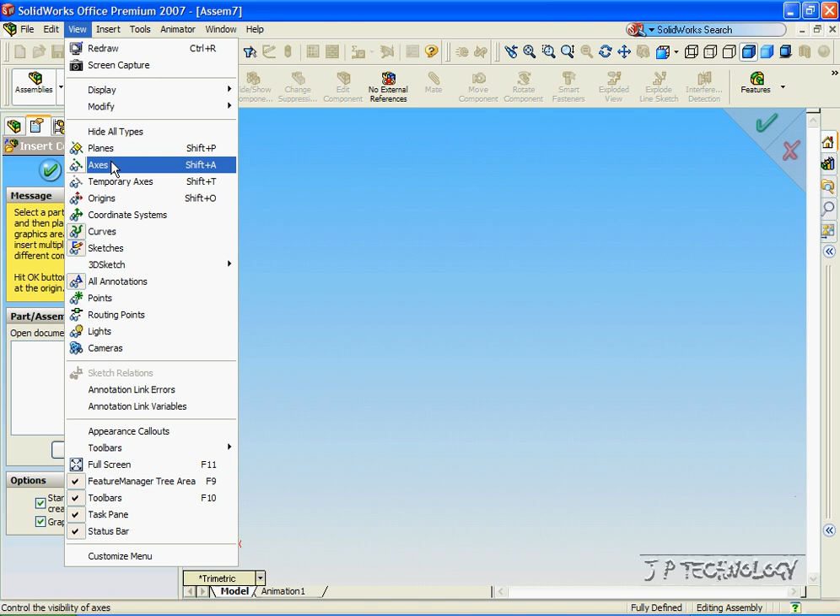To start off, let's open up a new assembly file. Let's click File, click New, click Assembly, click OK. Now let's view the origin by clicking View, then Origin, and let's browse for the parts that we need.

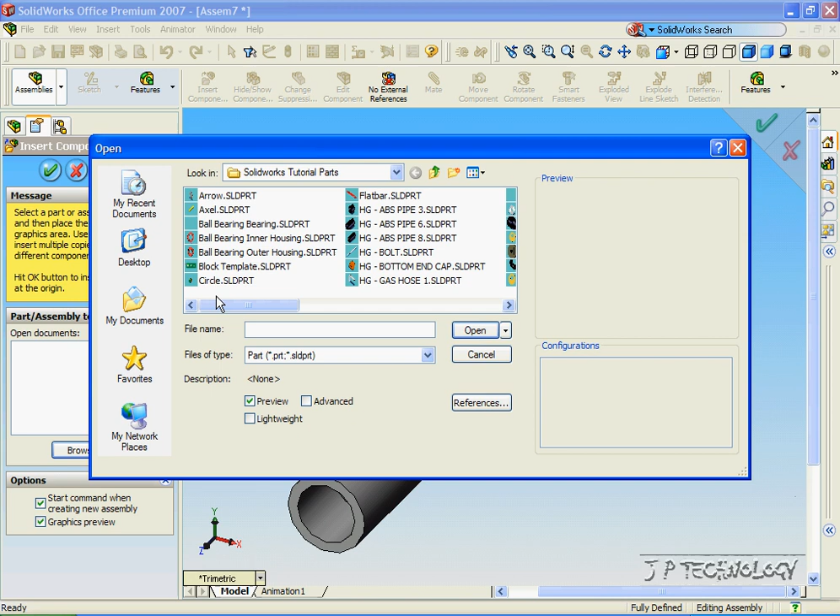All the parts that we need are found on the DVD, and the parts are Telescopic 30, 45, and 60. Now with Telescopic 60, let's open it up and we'll put it to the origin. Now let's get number 45 and put it beside 60, and we'll get 30 and put it beside 45.

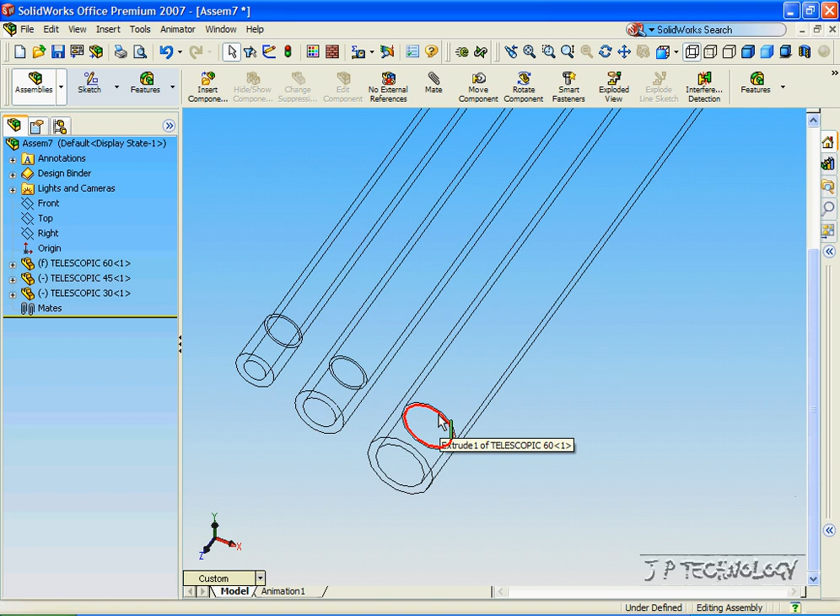Now let's zoom out a bit and click wireframe. From the wireframe you can see that inside of Telescopic 60 there's an inner radius that's smaller than the rest. What that's going to do is as 45 moves through it, it's free to move until the two radiuses are the same and then it stops. And that's the same with number 30 when we flip the direction of it.

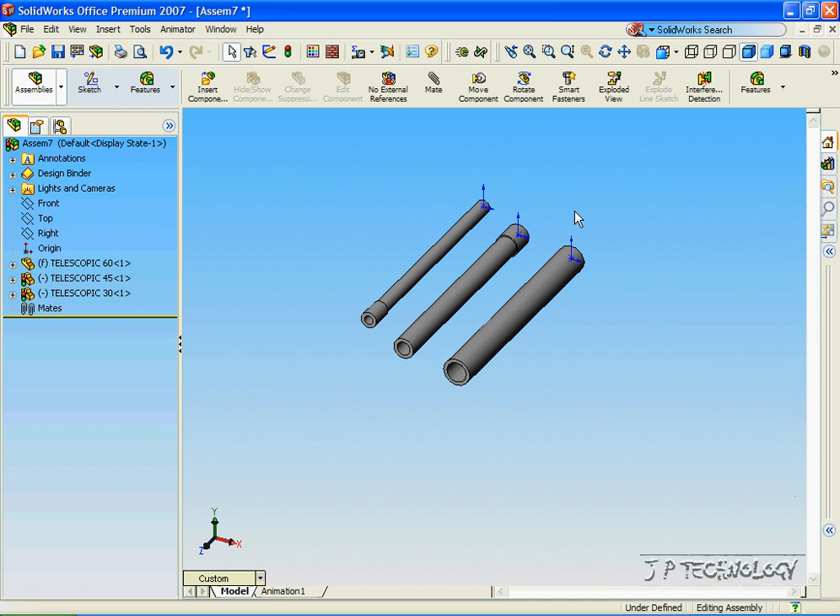So now let's go back to shaded with edges and we'll begin mating these. To start off, let's click mate, click this tube, and we'll make them concentric and click OK.

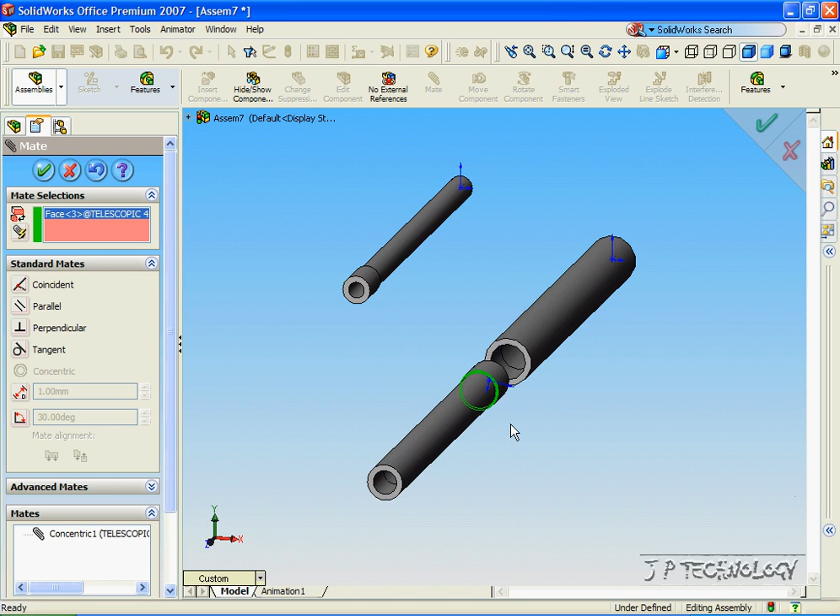Now let's pull this tube all the way out and let's click the front view. Now let's click this face, as you can see it's the face that sticks out. And as we go around, we're going to click this inside face of number 60 and we're going to go into advanced mates and we're going to have to do distances.

Now let's click isometric, click the wireframe so you can see inside what's going on. So what we're going to do is make a minimum value of 0 millimeters and then make a maximum value until the part is completely in.

So let's increase this and see where it's going. And it's going in the wrong direction right now, so we need to flip the direction. So now it's going in. So let's see how far we can make it go all the way in.

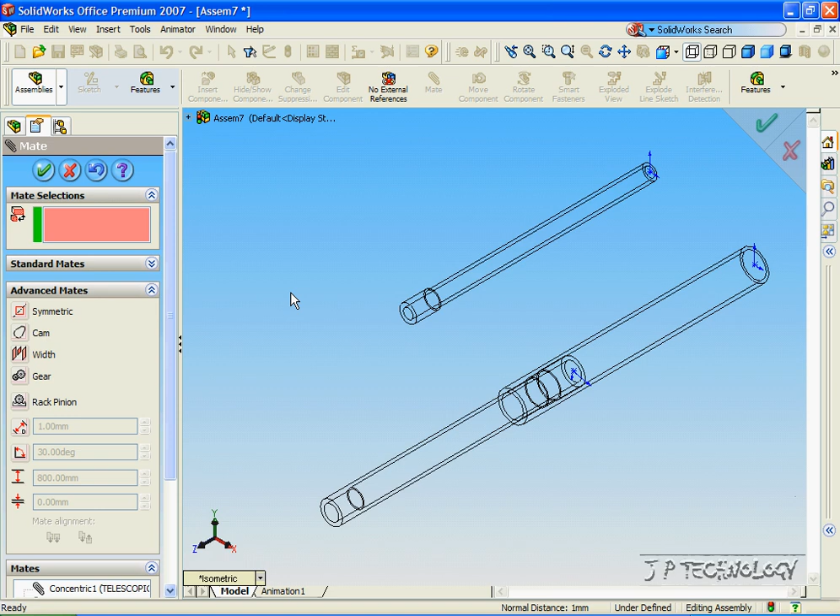Let's make it 1000, and that's too far. So let's change this to 800, and that looks good. So let's make the max 800. Click accept, click OK, click shaded with edges, and now we've made the first telescopic bit of our assembly.

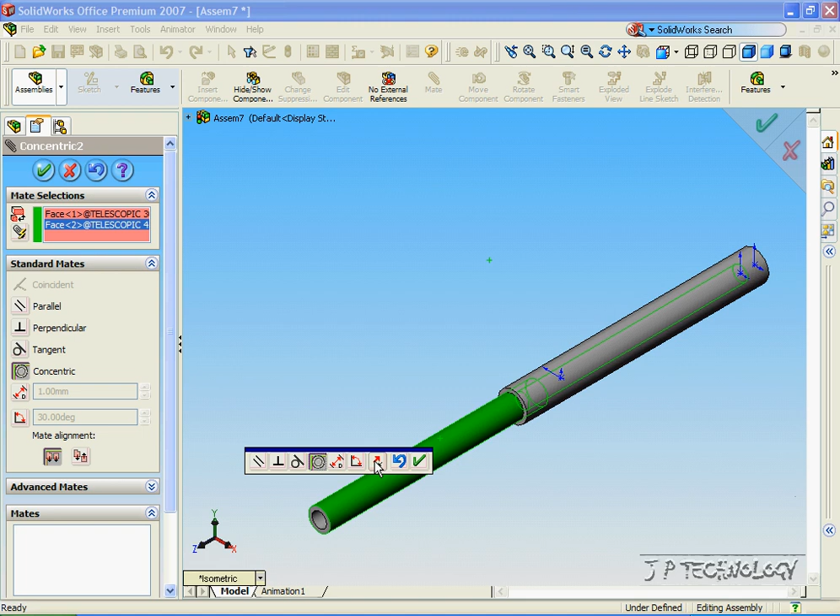Now let's work on the second one. Let's click mate, click this tube, and it's the wrong alignment, so let's flip it, click OK.

Now let's pull the little one out all the way, click the front view, and we're going to click this face, and that's the face that's protruding out. And we'll go to the back view and we're going to click on this face here.

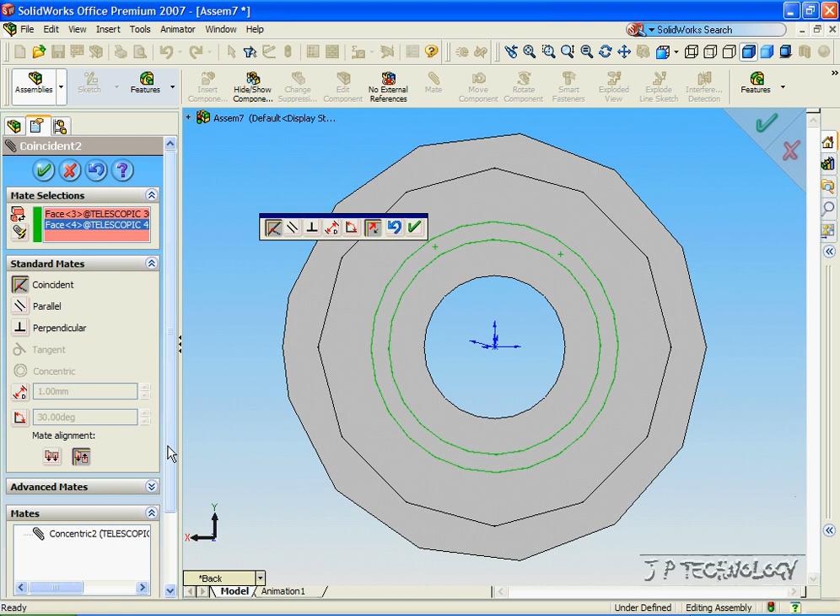And we're going to go into advanced mates and we're going to do a distance again. So let's click isometric and let's view it in wireframe. And we're going to make a minimum of 0 and a maximum of 800.

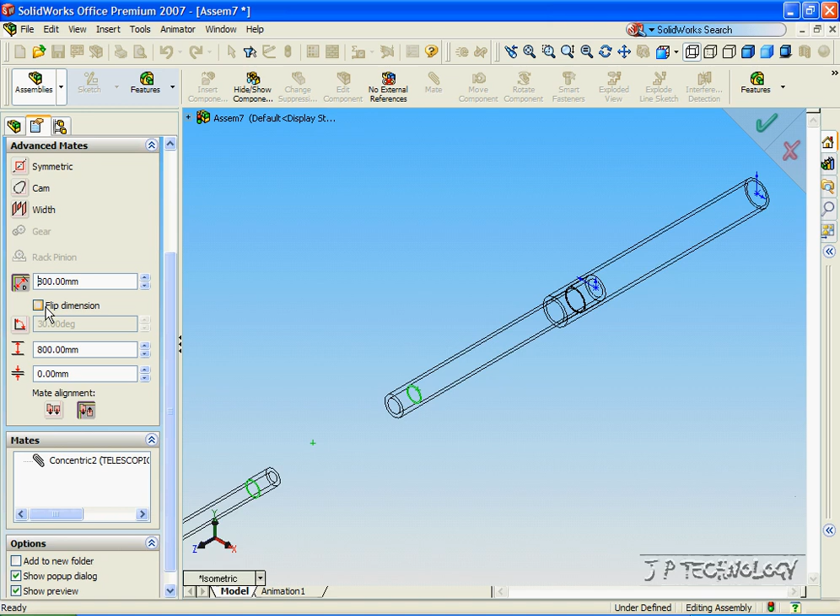Now let's see it at 800. Now it's the wrong direction, so we have to flip the direction again. Looks good. Click OK, click OK, and let's go back to shaded with edges.

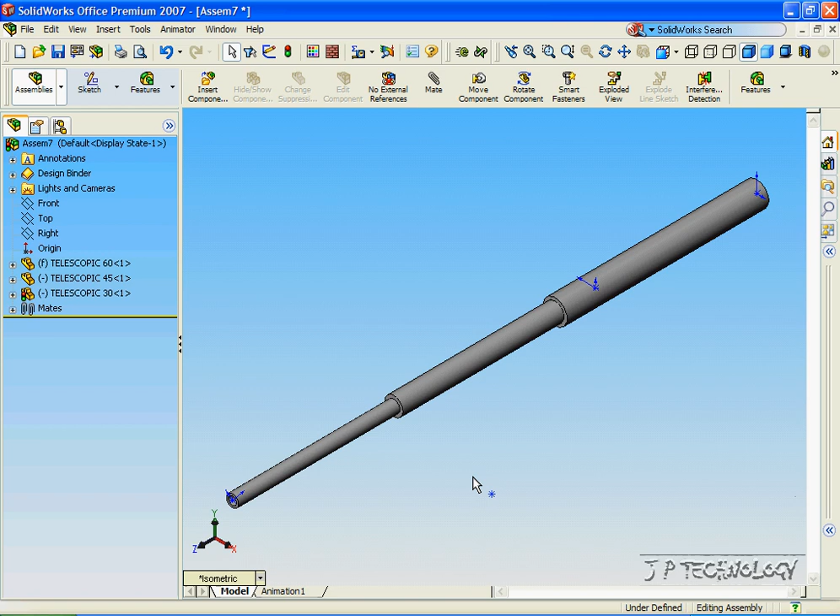And we can pull it out and push it all back in. So let's click isometric again. And we've created our telescopic part.

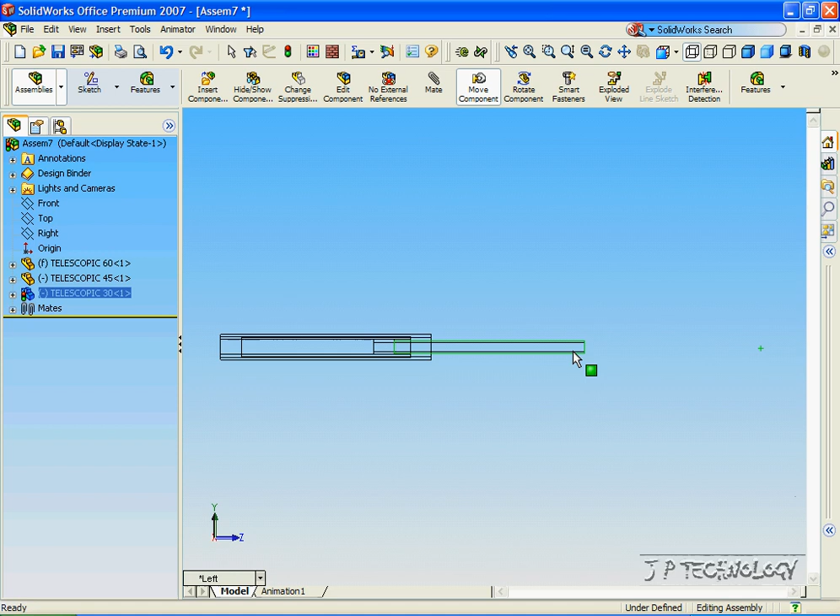Now let's click View, let's hide the origins, and let's look at it in wireframe. Let's look at it from the left so we can see exactly what's going on. Now you can see as we pull it through, it grabs one, and then it grabs the other. And that's exactly what we want it to do.

Now let's click Shade with Edges again, click Isometric, and that completes our tutorial on how to create a telescopic part with assembly.